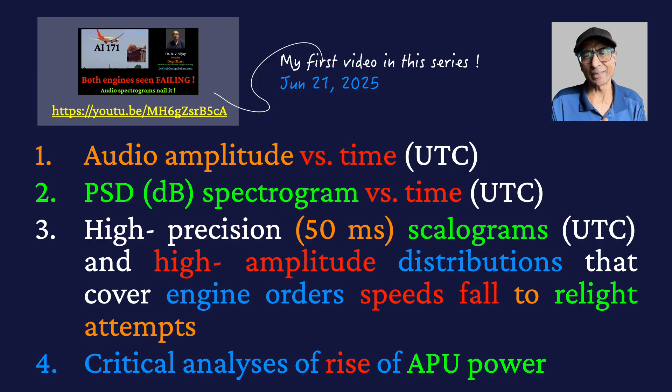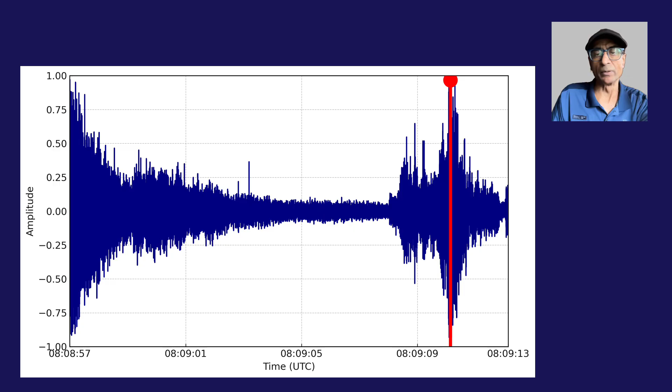Right, so let's look at the time domain record first, from the data that I had used earlier in my June 21st video. So the red line you see here, this is the place where the highest amplitude of the audio is. And I have considered the EAFR recording, the number 4 EAFR recording.

There were 2 EAFRs in this aircraft, one in the nose, one in the aft. The one in the aft was found to have got so damaged that nothing came out of it. Fortunately, there was this EAFR at the front of the aircraft, number 4, which gave them some of the data that they could use to really bring out a report with.

Now, I have considered that the recording stopped here. The time as per the report is 8:9:11, and I am assuming that the highest amplitude is at that particular time. Now, you might ask me why I believe that is at time 8:9:11.

Well, I have no way of proving it, of course, but the EAFR is a very high mil standard kind of system which can take a lot of high Gs, high temperatures, high pressures, and high stresses. So if at all we are seeing the recording getting stopped there, it's probably because one of those thresholds got exceeded. And where the amplitude is highest, I would expect some of these things to be really also consistent with that - a high amplitude, high stress or a high acceleration, which might end up causing the EAFR to stop recording. So that's the best ballpark kind of estimate of the placement of the timestamp on this audio recording.

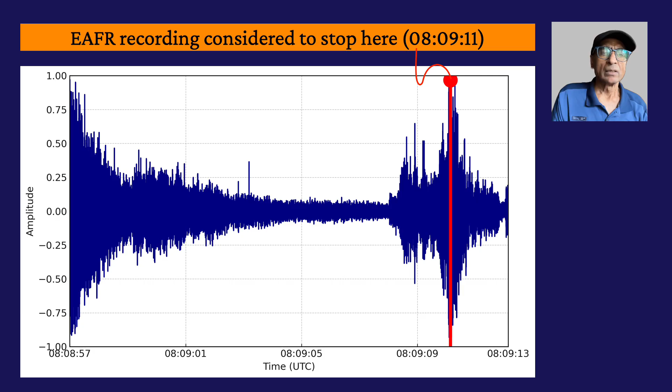Let's look at the other things we can notice here. The engine order speeds are falling from 57 onwards, as you can see for a second. There are two there. The pilots, again, did a relight attempt, and there was some rise in the amplitude, but you can see it fell because the FADEC aborts this. The full authority digital engine control, when it looks unfair on the part, cruel on the part of FADEC, to really abort an attempt to relight it, especially in an emergency like this.

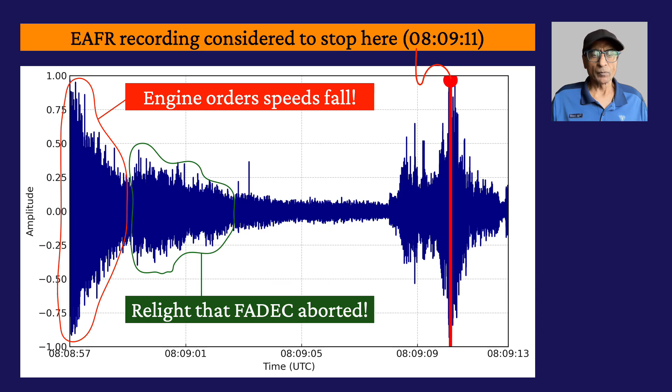But you will see that the FADEC could do nothing, though it was trying to fight with nature, which it couldn't do. Now, there's also the explosion of fuel-rich air happening at 0904, which I didn't talk about in the previous video. Then the mayday call at 0905 came because the pilots had run out of all options. They had tried their level best to bring up the aircraft again, but it was the wrong place, the wrong time, and the inevitable collision happened just before 0909 or so.

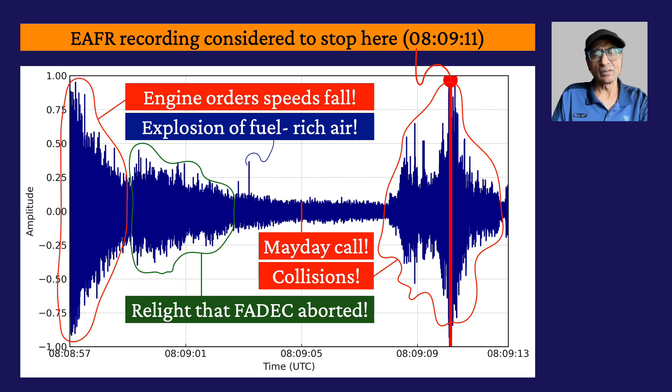So let's look at the spectrogram, and get to see things from the engine perspective and so on. This is the spectrogram. The one marks the place where the mayday call was given, the 0905 there. The two is where the recording stops.

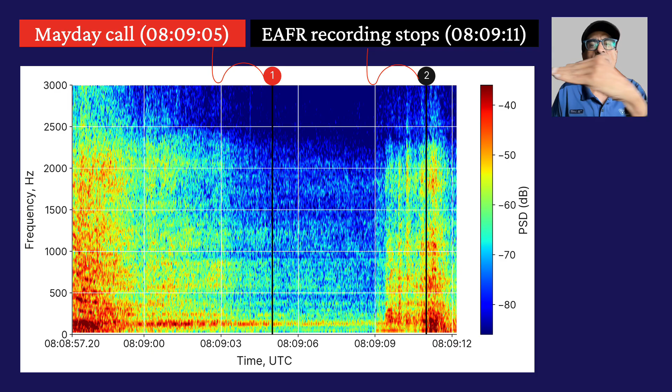What you notice is in the left hand of the graph near 57, and going for about a second or two, there are a lot of curves falling down to a level, scores one above the other. These are nothing but your engine orders whose speeds are falling down. I tried to visually mark a few arrows there to help you track the orders as they are falling.

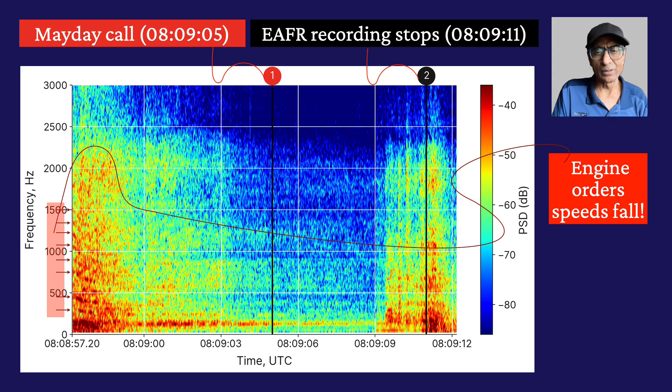Then there's a relight attempt, the pilots started relights from 854 onwards, a little preceding this. But what you see in the spectrogram is things really spread out all the way up to 0903. So I've considered the relight scalograms, which I'm going to bring out later. I've gone all the way up to 04 in fact.

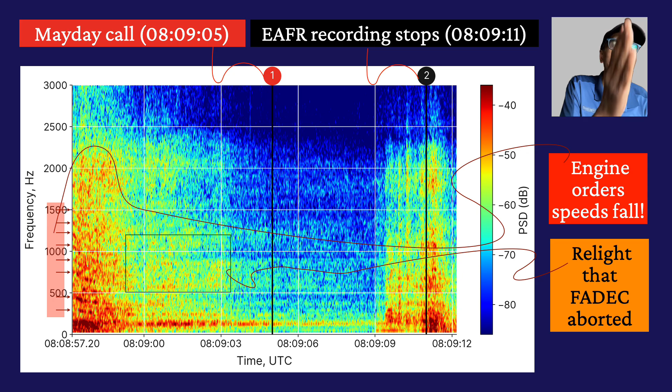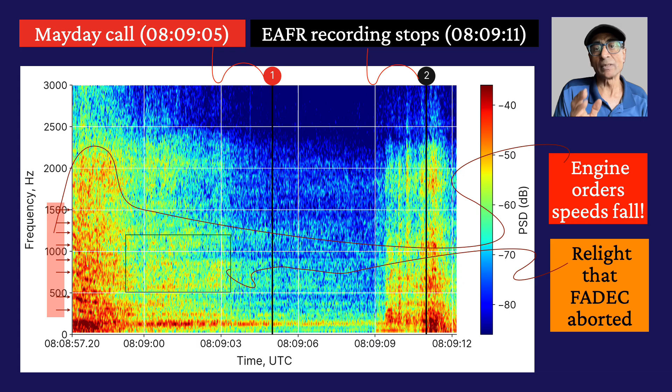Then, if you look very faintly at the spectrogram, you'll see a faint line going all the way up to 3000 hertz, somewhere at 04. Try to locate it between the mayday call mark and the 03 mark, somewhere midway between them. You'll see a faint mark, and that's actually where the fuel-rich air explodes. I'll get a closer picture of this in the scaleogram.

The bottom line you see is the faithful RAT that has been operating all the while. But the RAT can only do so much. It's a very low power system meant to try to wake up the major power source, the APU. But we'll also see why the APU couldn't do anything in spite of being woken up.

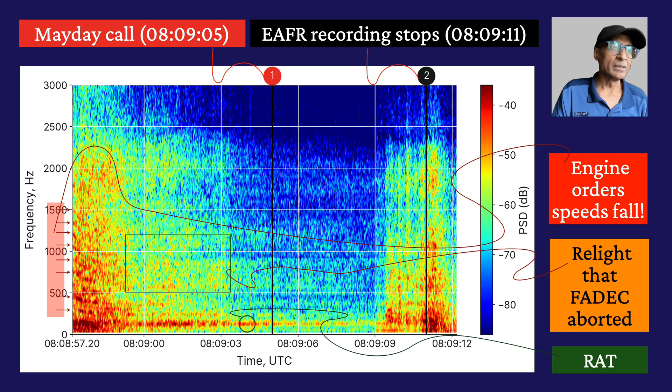Now, before I get to the scalograms, I want to bring out an algorithm I used for something I call the high amplitude distributions. A scalogram is a continuous wavelet transform, and it gives a matrix A that's a function of both the frequency and time.

So what I do is normalize this amplitude range and the A matrix to a 0 to 0.8 scale. I just chose 0.8 because it works for me, there's no particular reason for it. This normalized matrix I call A bar. I put it through this simple algorithm: I create a vector NF equal to the number of frequencies in the A bar matrix, which is also the number of rows.

What I do is generate a random number in the high amplitude regime, between 0.7 and 0.8, which is about 12.5% from the top. I look for all elements of the A bar matrix that exceed this random number R. These all belong to what I consider the high amplitude of the CWT, or the A bar matrix. The high amplitude is of interest to me when it's also seen at a high frequency, which means it belongs to the engine orders regime.

So at the end of this process, whenever I find the matrix element being more than R, I increase the count associated with that particular frequency by 1. So I get an NF of K at the end of this run, which tells me how many times I am seeing a high amplitude at a certain frequency.

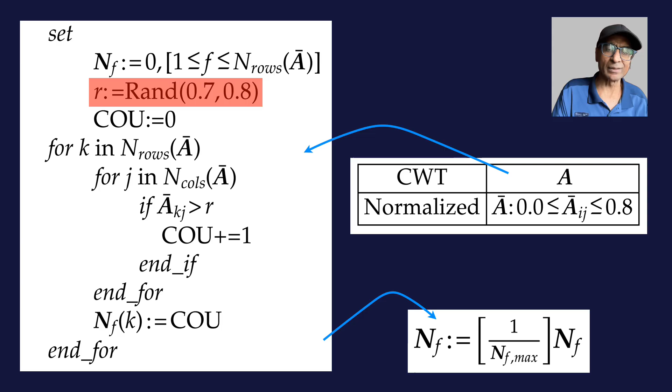So I go one step further. Now I max normalize to get a 0 to 1 NF vector rather than some random large numbers showing the counts. Alright, so now let's look at the first scaleogram.

Before I do, let me first tell you that I'm going to generate the scalograms in various windows. So this is the first 800 millisecond window, and this I call the window of hope, 57.2 to 58. I took 57.2, not 57, because there was a bit of audio narration preceding this up to 0.2, so I just started from there. I call this the window of hope because you're going to see that there's a lot of engine orders present here in this particular window.

So the first scaleogram in the frame, 57.2 to 57.25, is here. What you notice is a lot of high amplitude is certainly seen at the sub 500 frequency, especially around the frequency of RAT, which is around 100 hertz. And you do see a lot of content again at 500 and a bit somewhere around 1000 to 1500 too. Now the best way to understand this is not by just visual and verbal descriptions, but rather by looking at the high amplitude distribution, which I discussed in the algorithm a while back.

So the high amplitude distribution, if you look at the highest value here, that is obviously in the RAT, because the RAT has been working faithfully, and it's the only thing that has obviously been audible throughout that recording on the mid rooftop. So you would expect that to have the highest amplitude there.

Next, you see a couple of other peaks here, a little below 500 and a little past 1000. These respective arrows you can see marked on the scalogram there. These are, of course, the engine orders, because we know the RAT order is around 100 hertz, and the rest has to come only from the engines, if at all. What you notice is, of course, the engine orders are all well below the RAT's count.

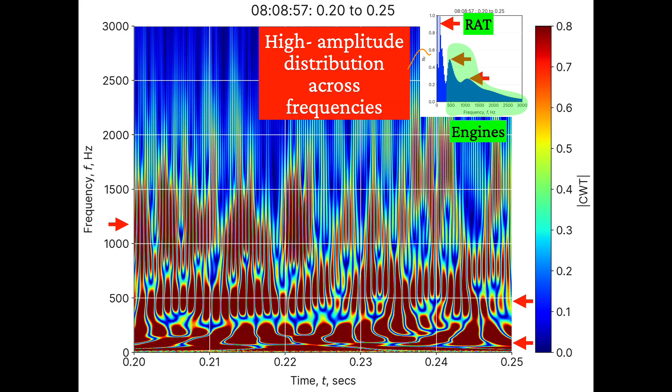So what if you look at the sub 500 order for a figure here, for example, in the NF, it's somewhere around 0.5, which means that you see something like the 500 hertz only 50% of the time compared to 100% of the time that you see the RAT frequency. So it gives you a rough feel for how often an engine order is consistently seen in this particular window frame. But by the way, this is just a 50 millisecond window frame, so it's not necessarily very suggestive of the long-term character of any of these phenomena, like the engine order or the RAT, being seen in the plot. So let's move to the next frame.

Now things have fallen down, unfortunately. They've come down to something like 20-25% on the engine side. They go up again, a little bit of a peak again around 500 hertz. A little encouraging sign here—again, these are reasons why I just decided to call this the window of hope.

Yeah, they keep going up at times. This is one of the strong ones—I could find things getting even up to 2500 hertz. In fact, you see a strong presence here even at 500, and also a fairly good presence even at 1000 up to 2500 hertz. So it looks like at this point of time, maybe there was some serious attempt to come back.

But again, things do fall. We'll understand why they're really falling rather than continuing to rise on both the engines. So as we near the end of this window, we're really left with something like a 40% presence of the high amplitude here around 500 hertz, compared to 100% of the RAT.

So the next one I call the window of fight back, but of course it was in vain—58 to 59, the next second. I'm just going to scroll a little quickly through the frames so that you can visually register the rises and falls as they happen.

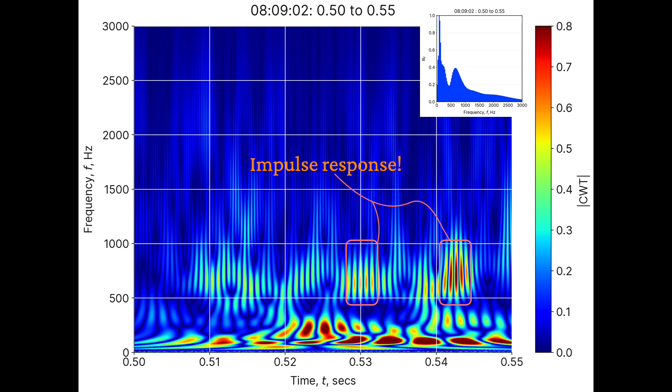Well, we are now at the end of this window. Again, it was all but over out here in 03 to 04. Literally nothing happening.

Anyone in this situation, I think, would not just... even the RAT, you can see, is now partly - if you see the non-continuous presence of the RAT frequency here, it's possibly also because the aircraft was quite far away from the microphone of the teenager who was holding it. So there's a possibility that we are looking at something that's also diminishing in amplitude because of the distance.

Right, so things are now almost all but over, if you were to summarize this.

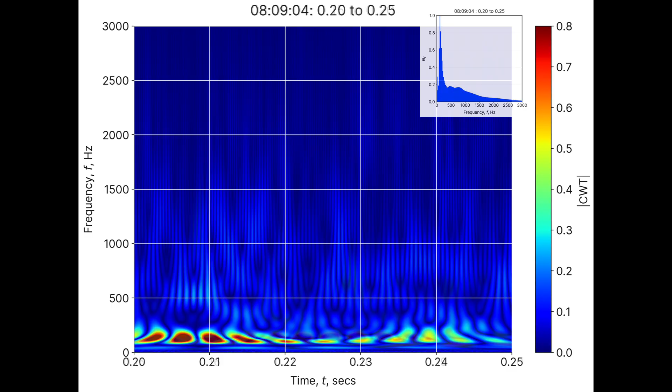Then let's get to the question that we are asking - the billion dollar question. Was a recovery ever possible at all in this aircraft? Could something have been done at all? The answer is sadly no.

Now, to see why, let's start by looking at the power sources in this aircraft. So there are three primary sources of power. Of course, I'm excluding the primary battery on the aircraft because I don't consider it a source at all - it's just there for very minimal functions.

So the RAT, we all know, is the active power source that is the first responder that also responded here, and it kept going all the way until the collision itself. But the RAT can only do so much - it's only a 10 kVA source at its peak, and the AI171 was certainly not flying to let the RAT operate at its peak either, so in fact it was sub 10 kVA.

But anyway, that wouldn't have mattered either way, because the real source that would have made a difference to the recovery, if at all, would have been the APU. The APU is the one that is used to rev up the engines and bring them up on the ground when the pilots initiate the engine start sequence. But the APU can really come up only when the fuel control switches are in the run mode, not in the cutoff mode. So the pilots have to transition from cutoff to run in order for that to happen.

So that's what they did. In fact, they did that at 08:52, and the APU inlet door, according to APU logic, opened 2 seconds later at 54. But you will see why things didn't end up the way one would have wanted them to.

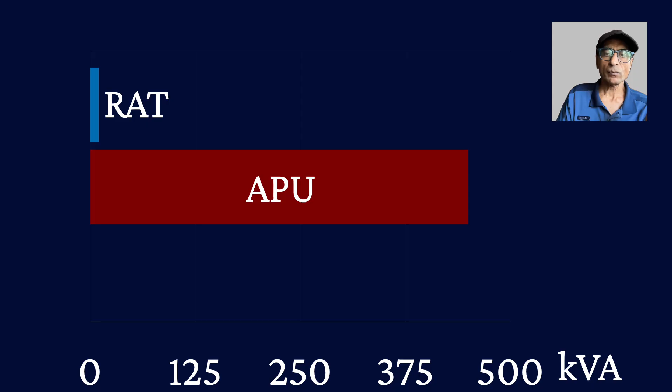There's a third source, of course, right on the engines - each engine has the VFSG, the variable frequency starter generator. These, of course, make the two generators there give you cumulatively 500 kVA, but again this is going to happen only if your engines are at full power. In that state, the VFSG works in generator mode, giving you enough power to the aircraft. Else it's in starter mode, depending on power to operate, and that power comes from the APU.

Right, so now let's look at an on-ground engine start. What happens here? The critical thing to look at is something called the HP compressor, the high pressure compressor. It's got multiple stages, and its associated speed is what they call N2 in the aircraft. There's also an N1 that's associated with the low pressure compressor spool - it's a little fed by this high HP stage, HP compressor.

Now the N2 is the crucial one, because it determines the extent to which the compression has gone - whether the compression ratio has been achieved in order for the engine power to be really brought out as per the design of the engine. Now that transition from a state of being in the red to the green happens usually around the 21% mark, from whatever documents I have been reading on the net.

So that happens to be around 2394 RPM here for an N2 max of 11,400 RPM.

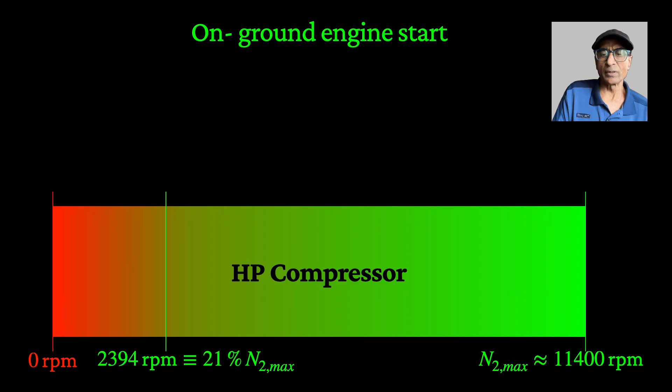So what happens when the pilots initiate a startup sequence on the ground? The APU is switched on once they bring the switches to run mode. The VFSG is in starter mode. But this process takes place leisurely, as the aircraft is probably going through a pushback and such things.

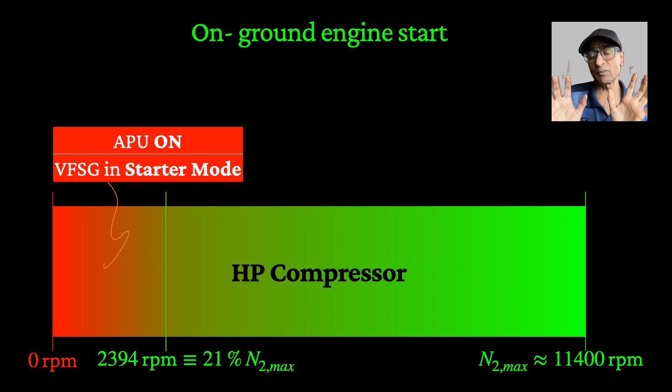During the pushback it slowly starts, and then by the end of the pushback it's almost near the transition mark of 21%, and they wait there till it really gets to the full green side before they start to roll to the runway.

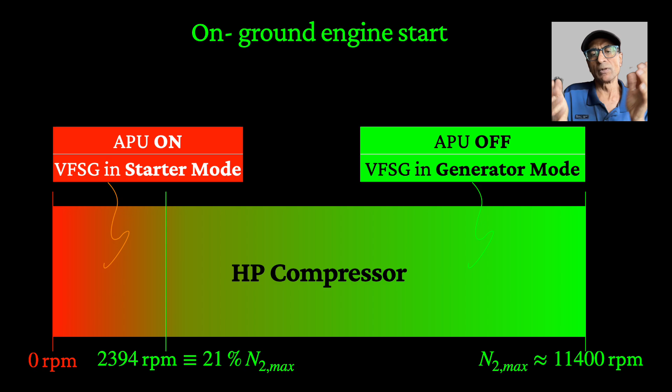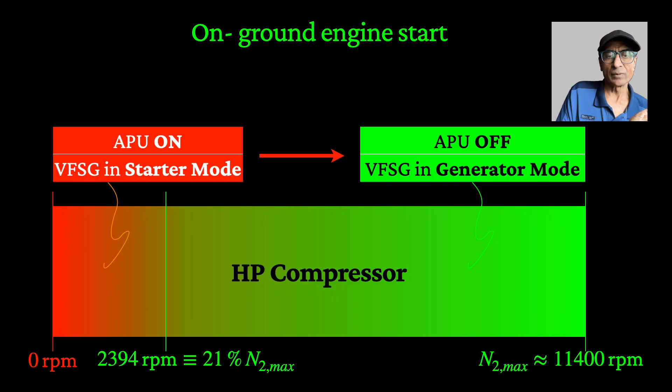Once they get to full power of the engines, the APU goes off. Of course, the APU might have gone off a little earlier, I don't know exactly where, but that's the FADEC call. And the VFSG, of course, is in generator mode. The point is, the time it really takes to get from red to green here is about 45 to 60 seconds.

That luxury of time is always available to the aircraft on the ground, and it was available to this particular aircraft too, because obviously they did have a successful takeoff. There was no issue there.

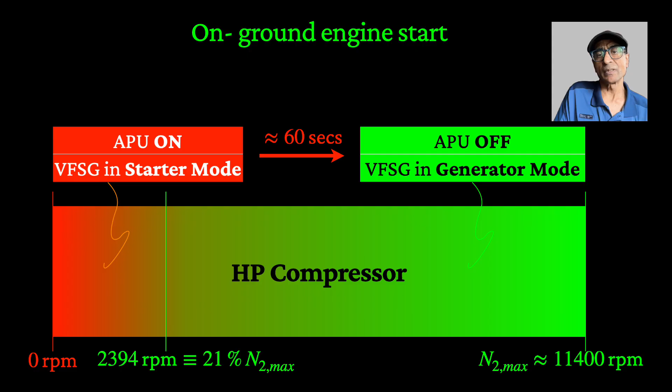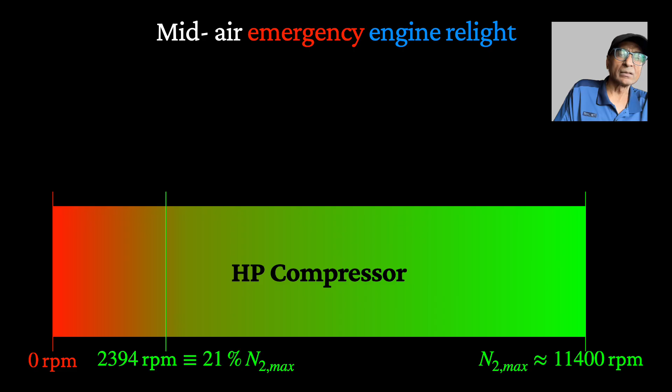Now let's look at what happens when it's airborne and how things are different. In a mid-air emergency engine relight, looking at the same HP compressor bar, what has happened is the engines are dead, and instantly the RAT comes on because the FADEC knows something is off and you have to try to come back.

So the RAT comes on, but the APU comes on only after the pilots have set the fuel control switches back to run, which they do about 10 seconds after the RAT has come on. And of course the VFSG too does come on again, because the APU is now triggering it to get into starter mode. But here's the thing: that 2394 RPM is a crucial transition point.

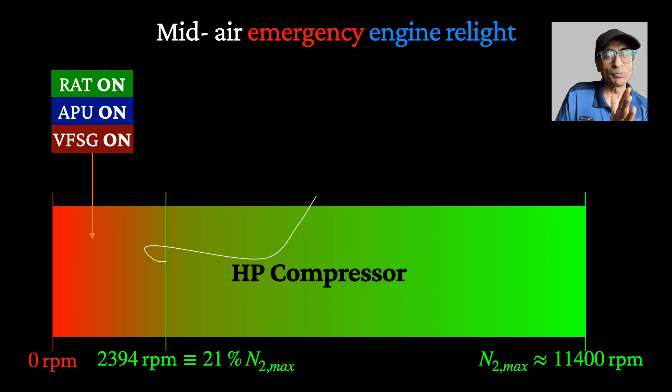And if you cannot reach that, the FADEC aborts the relight. Now in this aircraft's case, it's obvious that it could never be reached, because the aircraft was at a low speed, a low altitude.

There was no way it could even think of a windmill kind of start, which would have happened at some 30,000 or 35,000 feet, because there you can even nosedive the aircraft if you're not having the speed, and really force the N2 to get past this 21% mark.

But here, where were they? They were just above a few trees and chimneys, and no way they could even ever think of a windmill there. In fact, the aircraft was oriented adversely for a windmill kind of possibility.

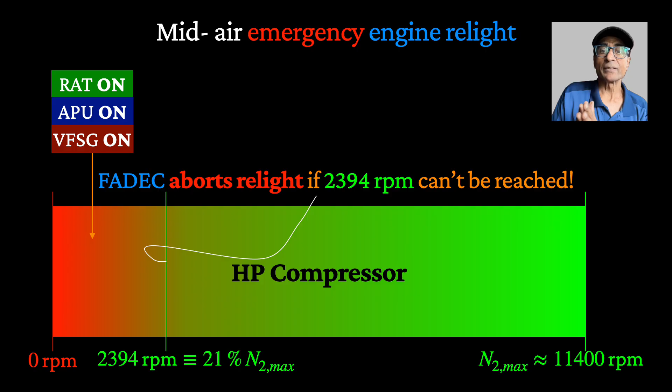But anyway, the pilots were doing whatever they really should have been doing. They never did anything against the book. So it was just a case of fate and being in the wrong place at the wrong time. Things didn't work out right for this aircraft.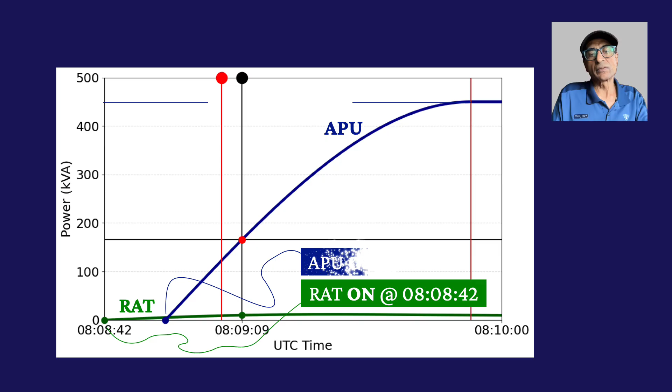And we'll see that again from this graph too. It's a kind of timeline of the rise of the APU power. So 8:42 is when the RAT automatically gets deployed with the FADEC. 10 seconds later, the pilots notice the switch transitions have happened, corrected. At 8:52:54, two seconds later, the APU inlet door opens.

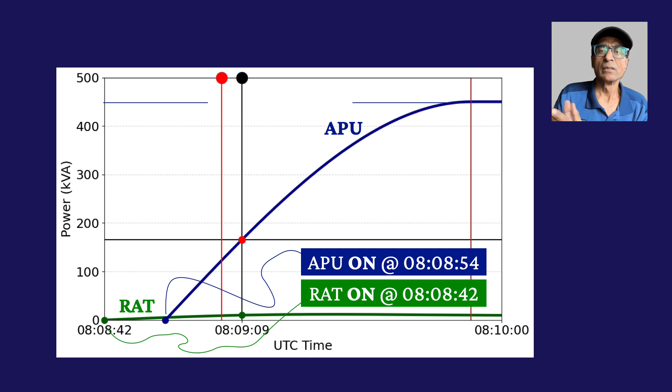These time stamps are according to the report, you can get the report and see that they are there. And the APU starts its work, sending power to the VFSG to start revving up the engines.

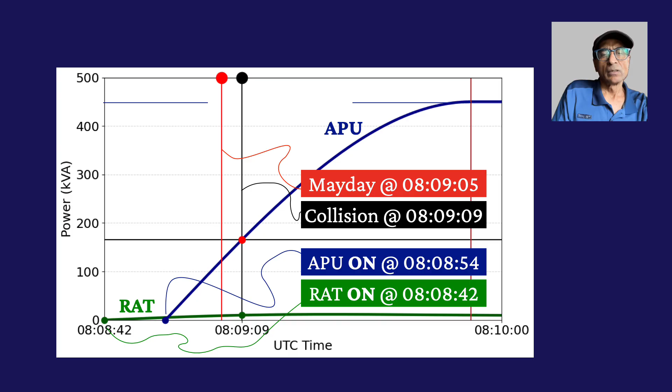So the mayday call here is at 0905 and the collision at 0909. To the right of this collision I've shaded it, because there's no point looking past the collision. But I still retain this because I want to bring up an important point: under ordinary circumstances, had there been no collision, you would have expected the APU to have stopped off here at 0954, when full power of the engine was reached.

Right? Now, how did I get this curve itself? That's again the best fit to the two points: 450 kVA on top, and the 60 second time interval it takes for the APU to rise. And the time where it starts, I knew that.

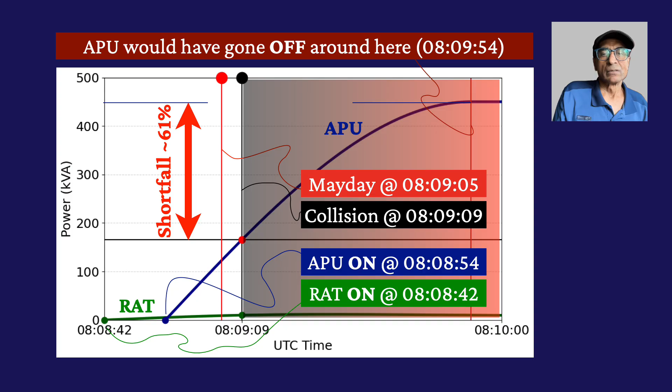But the point I'm trying to make is, there's a 61% shortfall of power at the time of collision. There's no magic that would have brought that 61% back in an instant for the aircraft to get out of where it was and save itself. It was not possible. In fact, the shortfall would have been a little higher at mayday time, probably 70%. So that's the picture of things.

Look, we have seen that throughout all the scalograms, and we see that here as well.

So just to summarize, before I do, let me try to answer this important question: what if the pilots had restored the switches to run as soon as their transition cut off? Would that have made any difference? This is a good question to ask, but sadly the answer is this.

Had the switches been restored to run as soon as they had been cut off, that would have given the APU another 10 seconds. So rather than reaching full power by 954, it would have come to full power by 944. But collision was impending at 909 itself, way earlier. So that pilot delay hardly mattered here. It was no issue at all because collision was destined to happen first.

So let's summarize things now, what we have seen this far.

So the engine orders we have seen, speeds have been falling to near zero by 0858. The engines go dead there. The relight attempts are seen from 58 to 903, but the FADEC has been clearly aborting these attempts, because the way it's designed is to abort if the N2 is not adequate. The thermodynamic cycles of this gas turbine require that you achieve a necessary compression ratio before injection and ignition.

But of course, I'm not sure how the injections still continued for a long time even though the FADEC had aborted attempts. I guess there's an independent option there, or the FADEC still allows you to try whatever it can. So the only consequence was that the fuel-air mix was getting richer and richer, and at some point it crossed its threshold of stability as a fuel vapor and had to explode at 90404.